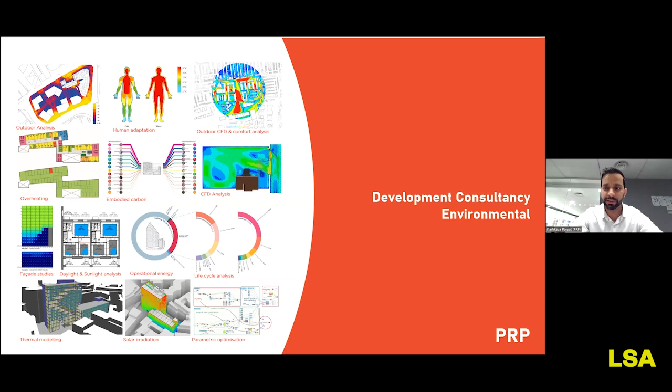So very quickly on my background, I've got, if I can say in a more polite manner, a very strong background in terms of environmental modeling. What you're seeing on the screen is different kinds of environmental studies that I've carried out in the past through my journey of environmental design. This extends from any kind of outdoor analysis to indoor analysis, and it extends in terms of breadth from human adaptation studies to CFD studies, which are probably considered the most extensive ones, including the optimization between all of these studies.

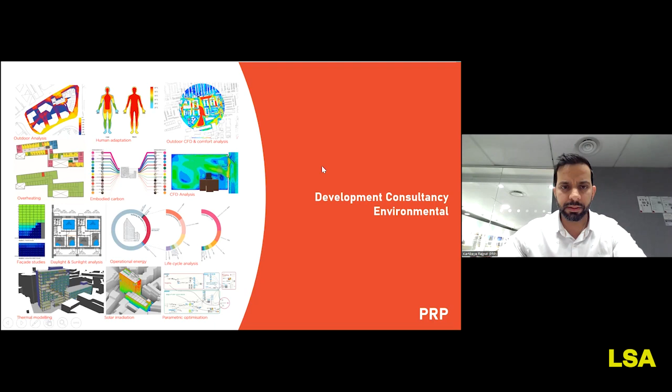So I've got two sides to myself: one is professional, the other is academic. I've been involved - currently working as Associate Director at PRP, but in the past I've been working with consultants, mostly M&E and sustainability design consultants. I've also got an academic side where I've done my master's from the Architectural Association and I'm currently teaching at Westminster, along with having ties with other universities. So I've got two of these sides.

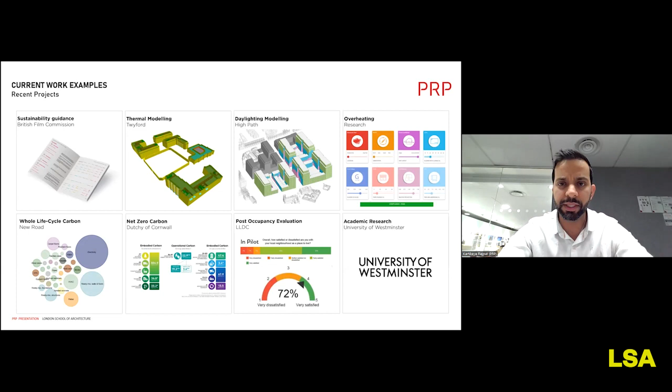More recently, these are some of the examples of the projects that we are carrying out at PRP. So there is a big breadth of work which extends from writing guidances to carrying out post-occupancy evaluation and obviously also undertaking loads of overheating assessments.

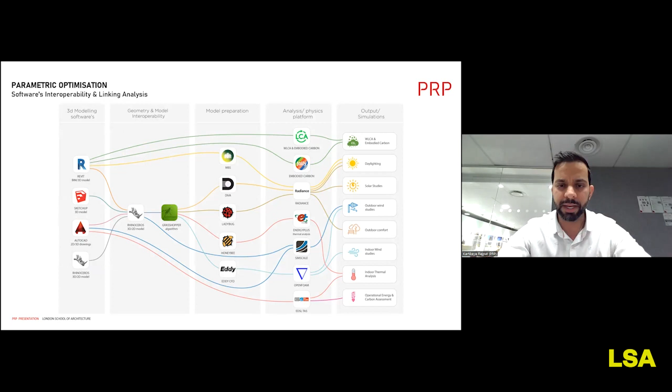One final slide about us. All the environmental studies require a lot more integration in terms of softwares and modeling methods. An important point in between is the building physics platform, which sits somewhere in the middle. So it's not just about doing a modeling, but it's also about understanding what building physics goes behind it, and what are the outcomes of those building physics simulations to lead to some sort of passive design measures on sustainability integration into building. So it's just a prompt on that one.

Moving on to today's session, which is around tackling overheating and essentially focusing on Part O.

I've divided the content into sections to help you understand what we are going through in today's part. We are going to look at the background into Approved Document O. There are two methods in Approved Document O: one is simplified, and one is dynamic. I wanted to introduce both and give you a flavor of the difference between doing simple calculations versus something more comprehensive, which we call thermal modeling. We've also created, or are in the process of creating, our own in-house tool or assessment. I'll show you some quick images of where it is, and there will be key messages dotted around in the slides, but we'll end with something simple for you to take away.

I won't go into today's session in more detail yet. Before we jump to Part O, the real question is: is overheating a concern in the UK? There are lots of parts of the globe where it is, and you may be surprised that a decade ago, people weren't too worried in the UK about overheating. That's probably one reason why we're seeing these new building regulations coming into force.

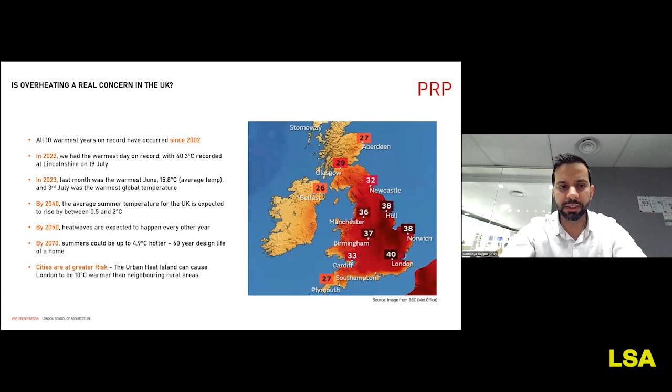Quick points on the future: it's not going to settle down, it's going to get hotter. The same applies to the UK, and it's expected there could be a 5-degree temperature increase by 2070. That's a small thought I wanted to leave in everyone's mind for this session. There's another aspect to this beyond climate change.

This brings a lot of risk to buildings and the people inhabiting them, and essentially these risks are of two kinds. One is a lot more serious, in terms of death, and many deaths are already being linked to overheating, and this is going to increase. That number is expected to be higher, so we have to be more careful about this. On the other hand, there's also the quality of the property, and at the same time this could be considered a defect if a building does not mitigate overheating.

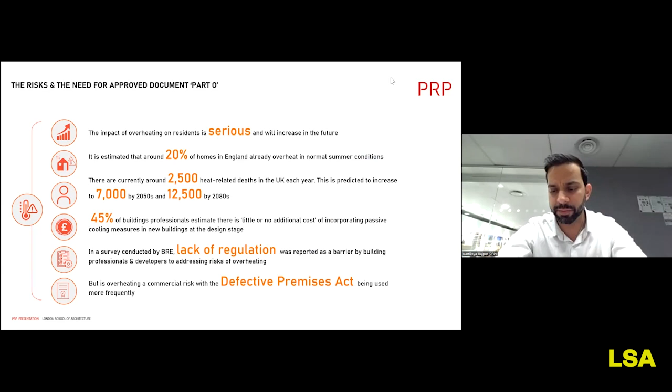There are also studies which suggest that already 20% of UK homes are overheating. So there's been a big requirement for us to come up with a regulation, and that's why you're seeing Approved Document O, which has now become part of building regulations.

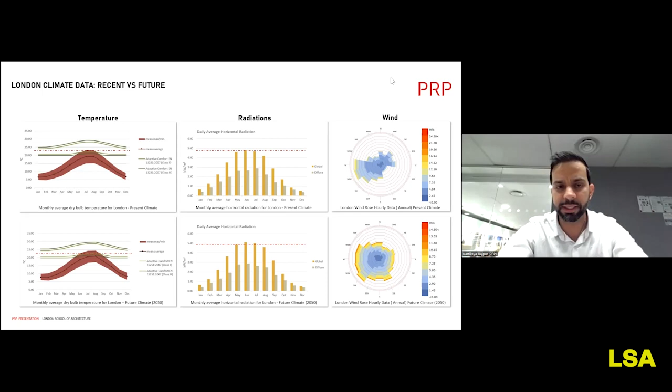Another reminder on temperatures: even when you look at London temperature and compare the present against the future, the next 30 years, there is a very significant increase. Along with that, we have increased solar radiation and a lot more fluctuation in wind speeds. So it's not just about temperature, it's also about solar radiation and winds, and more holistically, the entire climate we have. The UK climate is not the same as it used to be 10 or even 20 years back.

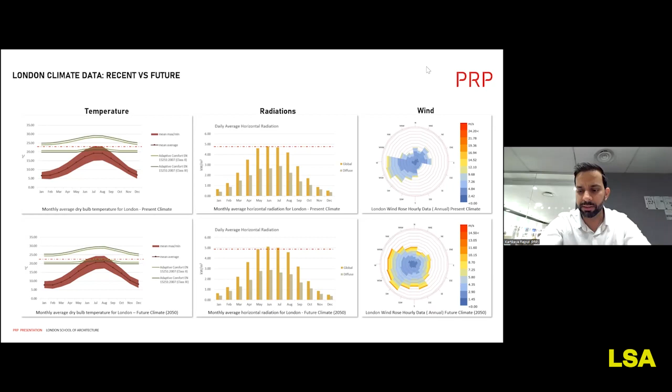It's changing, and it's changing very fast, and that gives us an indication that our building design should also be changing. Hopefully this statement echoes throughout the session as you look at the other slides.

Moving from climate to comfort, which is very important. If you compare climate with how we feel in a geographic location or within a building, it's more important to understand the perception of people and the climate. What you're seeing here are factors like temperature, solar radiation, wind, and humidity, and what subcategories affect our comfort. It's not just one thing that affects comfort, it's a combination of all these things.

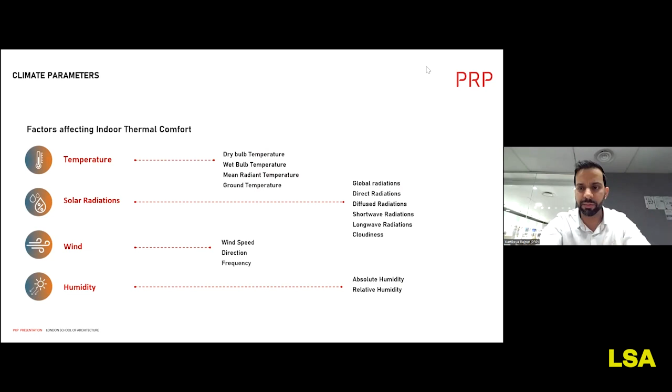More generally, if you talk to people and your friends, they'll talk about temperatures, but that's not the entire story. You have to think of solar radiation, wind speeds, humidity levels, mean radiant temperatures, and lots of other parameters. We're not going to go into super detail, but I do want to bring this discussion to the forefront: it's not just temperatures, there are a lot of other factors involved in achieving thermal comfort.

So Approved Document O is not something new. When you look at what the UK has already been coming up with in terms of guidance, there have been some good guidances, mostly from CIBSE, tracing back to the early 2000s, where principles were outlined for designing for natural ventilation. Later on, criteria were established for doing thermal comfort assessments, which is BS EN 15251. From that we had a technical memorandum from CIBSE around establishing comfort criteria. That got embedded later into CIBSE Guide A. Then we had CIBSE TM59, and more recently now we have Part O.

So we had these guidances, but what we did not have was a building regulation. If you think about it, the principles existed, there were some buildings doing all of these things which was requested, but there was no trigger in terms of building regulations. So that has given us a big strength in this context.

Part O essentially relates itself to new residential development. So it's not relating to non-residential development, but it extends a little bit into building categories related to greater use by people as living spaces. So care homes, for example, which might fall into a non-residential category, have to undertake the Part O assessment. This slide gives you more understanding of that. If the document says new residential buildings, please don't think that it's just residential in the narrow sense - it's dwellings and flats, but it could also be student accommodations, care homes, and other things.

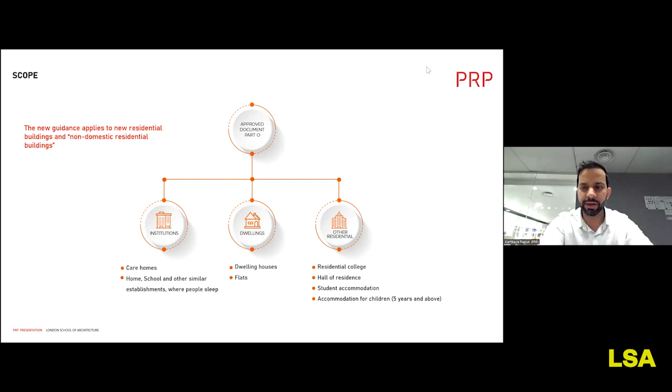So what Part O brings is not entirely new. It is utilizing the methodologies and methods from CIBSE TM59. So usually when I say Part O, I say CIBSE TM59 plus Part O, as a connotation rather than just saying Part O. It's also a prompt and reminder for all of us that it's not exactly new.

Part O is an extensive guidance in terms of what needs to be done, but a lot of it also exists in what we call secondary and tertiary documents. TM59 is one of the primary secondary documents that you need to refer to if you want to understand and go a lot deeper into the principles, the physics, and the criteria being used. Part O wouldn't say much on that - it simply refers you to CIBSE TM59.

So you might ask, what's the new thing? The new thing is a simplified method, which I'm calling approach 1. Approach 2 is reflected back to CIBSE TM59 with some additional controls or additional limits set against it. So the simplified method is completely new, and the dynamic modeling method is piggybacking on TM59. One can think of it as one being a prescriptive approach and the other being a simulation method.

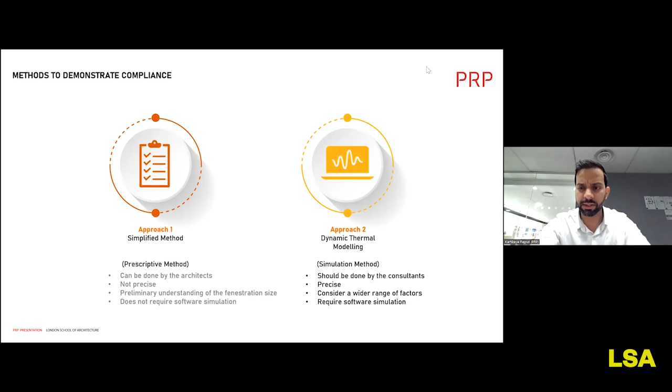So Part O, in a very simple manner, talks about two things. One is mitigating overheating, basically limiting the solar gains inside the building during summer, not winter. At the same time, it requests providing enough means of removing the heat, i.e. natural ventilation measures, so that we can make the best possible use of passive design.

In addition to that, Part O has also come up with some safety requirements where we found situations where, although the building is making use of passive design measures, it's not following the principles of secure by design or safety or other things. So Part O helps in bringing all of these disciplines together.

Even in this document, mechanical cooling is left as a last resort. So on all your projects, please don't go with mechanical cooling from the start. You really have to explore passive measures first, and you have to demonstrate that you have undertaken those processes.

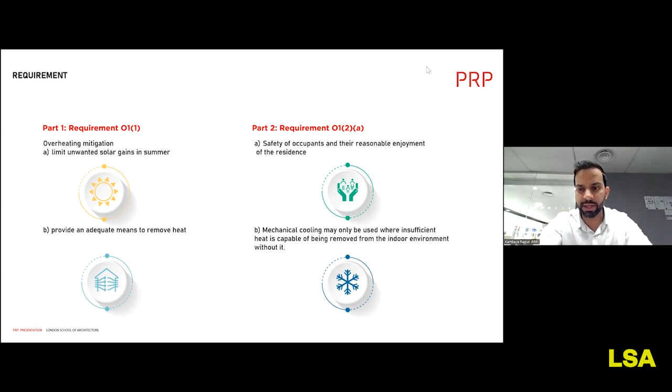So the simplified method is, to make it simple, England has been divided into two categories, high risk and moderate risk. Then the ventilation aspect is divided into units which have cross ventilation and single-sided ventilation. The last one is orientation of the facades - wherever the proposed building has a bigger orientation of its facade.

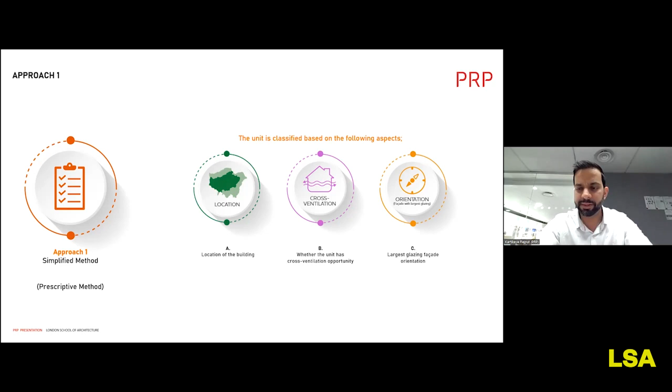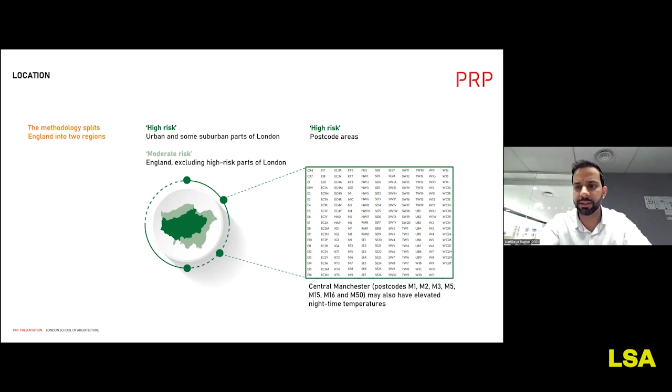So if you have this information, you would be able to make your first step towards a quick prescriptive method calculation. This is not dynamic, it's simply based on hand calcs. There are codes which define what is high risk and what is moderate risk - you can find it in the ADO, Approved Document O. Then you look for your postcode and locate your building, and you might be able to understand whether you are in a high or moderate risk area.

In terms of cross ventilation, the definition is something very interesting, because if you look at different documents, cross ventilation means something different. The idea is fairly easy for everyone to understand, but in the past, or even now, it has not been entirely resolved what you would classify as cross ventilation. This is related to the complexity of the buildings and the unit itself. It's an important point for all of you - if you look at all these building regulations, what does cross ventilation mean? It's a very simple thing, not something complicated. But this is where the complexity lies in the reality we get stuck with.

There is another prompt on cross ventilation - if you look at the new London guidance, you see another definition. Moving on to Part O, it's making it very clear that the opposite walls of the units, if they have windows, that is what we would mean by cross ventilation. This assessment is at unit level, not at building level. So your building might have windows on two ends, north and south facade for example, but that would not qualify as cross ventilation if the unit itself doesn't have the opportunity for cross ventilation from the two ends. So please remember it is unit level assessment, and it has to be on the opposite ends.

Once you have this information, the next step is how do we apply these two criteria: limiting solar gains and removing excess heat. To tackle this, the simplified method has capped the maximum glazing areas - you can't provide more than a certain amount of glazing ratio. They have also outlined the minimum amount of ventilation area that is required. So those are the two things you need to achieve when doing these hand calculations.

So I've tried to simplify the guidance from ADO, since sometimes when you've looked at it already you might find it a little confusing. Hopefully these diagrams make it easier for you to understand. If you follow the method from the top of this diagram - first deciding which location you're in, high risk or moderate risk, then deciding cross ventilation or single-sided ventilation - you get all the percentages required by the criteria. If you follow that sequence, it might make it a lot easier to interpret this table. I don't expect you to interpret it alone, so I've made some simple studies to help you understand.

Essentially, it is location, single-sided or cross ventilation, and then different orientations of glazing facades. With those things, for all these different options, you have to meet different amounts of glazing ratios. Very simplistically, for criterion one, limiting solar gains, we have to comply with maximum glazing area at unit level as well as at living room level. So you have to comply with these glazing ratios against the unit floor area and also against the living room area - that's what G1 and G2 represent in this case.

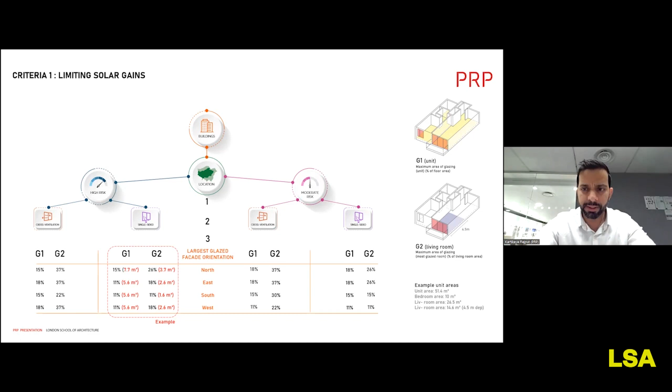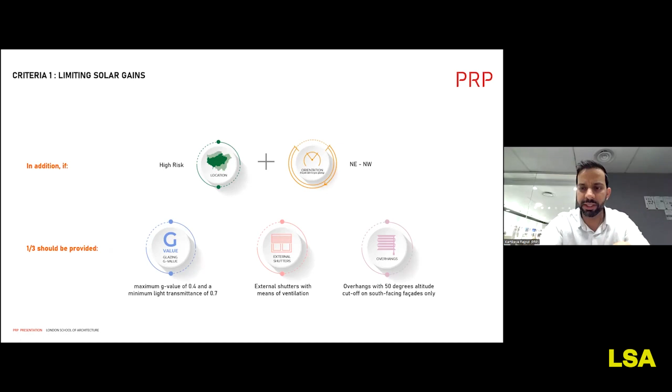So in addition to that, based on the orientation of the unit, which is where the maximum facade area is, we also have to provide one of three options: glazing with solar control, external shutters, or overhangs. These are the requirements for limiting solar gains. And if you think of it in terms of percentages that you have to meet for glazing ratios, it might make a lot more sense why that table was structured that way.

In a similar manner, in terms of making sure we have enough openability at a unit level, there are percentages outlined at unit level, but this time it's also outlined at bedroom level. So compared to the living room, now you have to do a bedroom calculation as well. What we have to do is, again, identify the location, identify which building risk category it falls into, and whether it has cross or single-sided ventilation. Then you provide for those percentages outlined in the ADO.

All these percentages you're seeing in the diagrams, you can find in the ADO. It's just a direct extraction from there. What you would have noticed is that there are some opening percentages against a facade option which are very, very high—you can see there's 95% of facade that has been asked to be open. So we've done some case studies which will make it easy for you to understand the implication of these calculations.

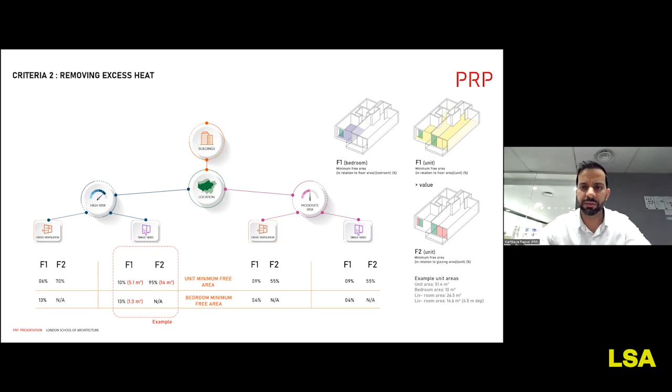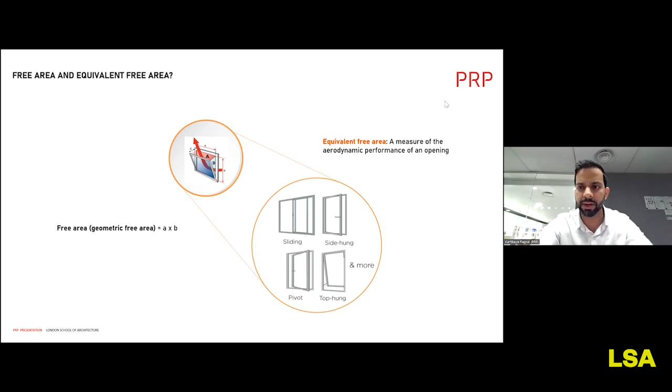But before we jump into that, an important reminder is that these openable areas are not based on just the size of the window. It's something we use very often in environmental considerations, called equivalent free areas, but it might be more challenging for you to do these calculations if you're new or haven't been aware of this. Essentially, these are much more detailed calculations which account for the opening of the windows, type of windows, angle of the windows, and other things. It's something we've done very commonly when we do fire vent and smoke vent calculations.

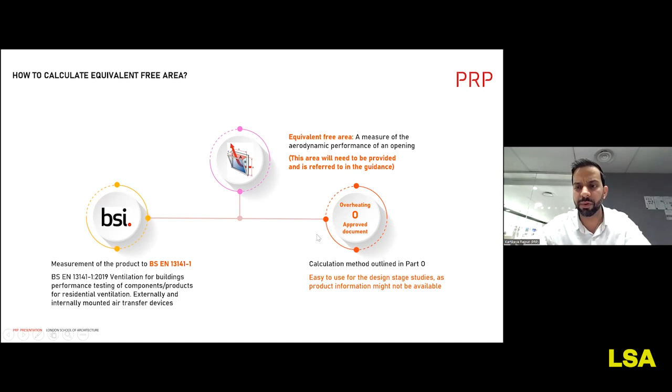Part O has also created a method where you can do these calculations. So you have to do these calculations before you arrive at your openable areas. So it's a reminder again that you have to be careful—it's not just the size of the window, it's a bit more of a complex calculation.

So for this session, what we've done is taken one of our case examples. This is in London, one of our projects. What we've done is taken a one-bedroom studio in a typical ten-storey apartment block building. We thought this assessment could have a lot of impact on the standard units we usually do, and hopefully this would also be a standard unit in terms of sizing that you might be currently working on. It's not very different from current building standards in terms of areas and other things. But keep in mind, this is for a flat assessment, not for houses or detached units.

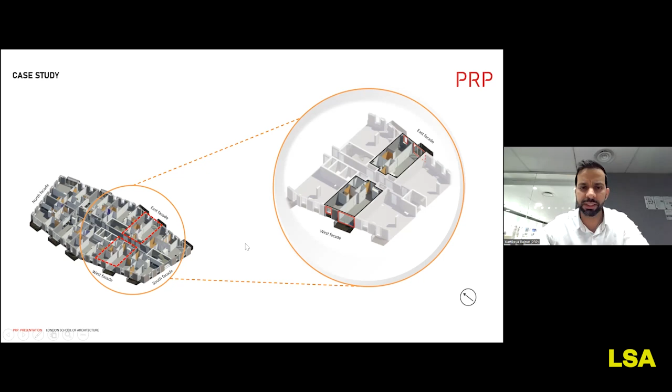So what we did is we took two opposite orientations, east and west, but the unit size is exactly the same—it's an exact mirror of the unit. We did the study for east and west to understand what the implication of this requirement is.

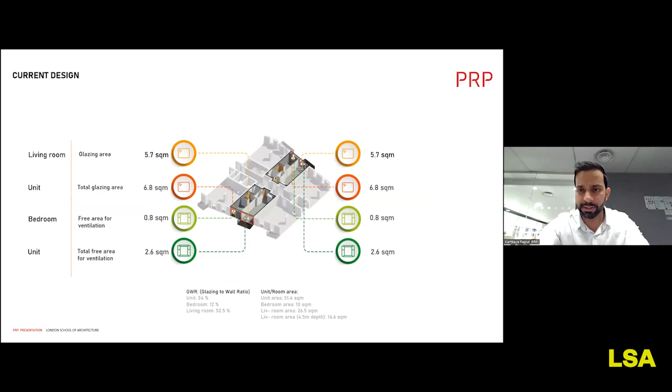Then, the criteria I just showed, we converted them into areas. So we did this whole set of calculations in the background, and arrived at the requirements at unit level, living room level, and bedroom level. We converted these ratios as requested by the simplified method, and then converted these areas into percentages as requested in the ADO method. So we did this calculation in the background.

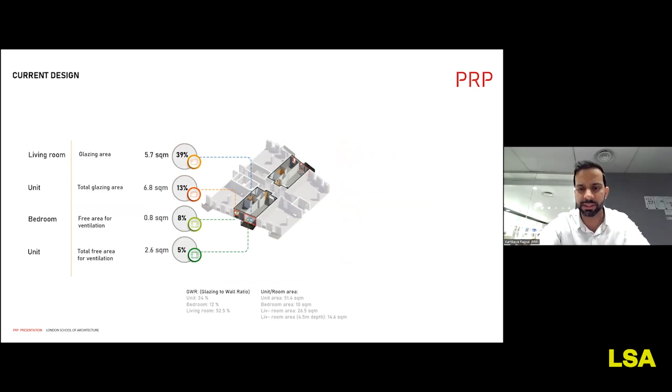The next step for us was to compare what we need to do. So we did the comparison, and it's shown in the circles you see on white background. Probably here I would explain a couple of points, but the two main important things that stood out were when we compared our unit to this requirement, there was something we had to comply with.

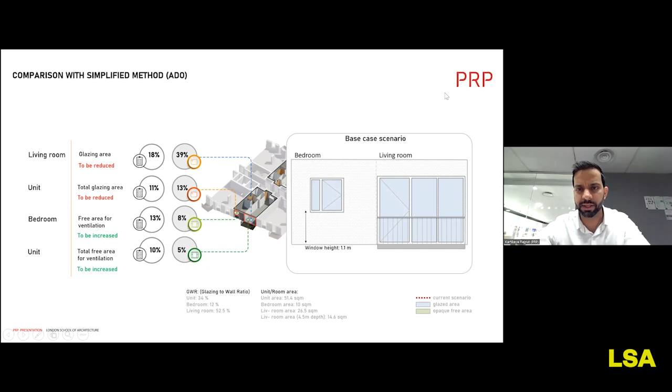Next, we started looking at the impact of these ones. So we looked at, okay, if we have to reduce or match this limit, what will happen? You could see the impact on this living room - it's almost like we have to reduce our glazing to half.

Moving forward, we had to make more adjustments on unit level. We made our bedroom window slightly smaller, and to accommodate more ventilation in the bedroom, we had to change our window sizes to be tighter. The next thing was, at unit level, to meet this free area requirement, we have to add a vent. So you would probably see the amount of changes that this facade is going through to just incorporate these simple guidances or percentages.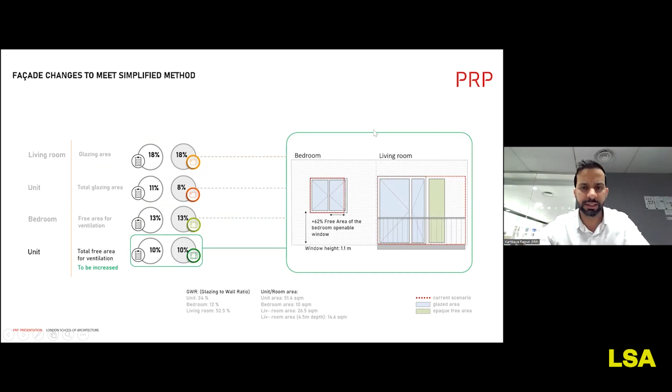Then we did more calculation based on equivalent areas, and this is what the facade would look like to comply with this requirement. Essentially, what's happening is that almost everything has to be converted into a vent, which could have a very detrimental impact into energy aspects and could also have an impact on daylighting.

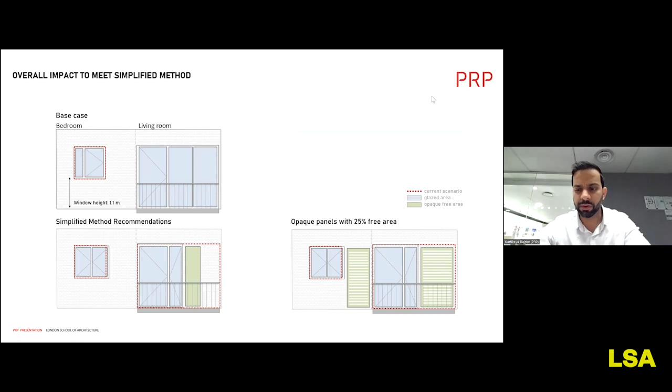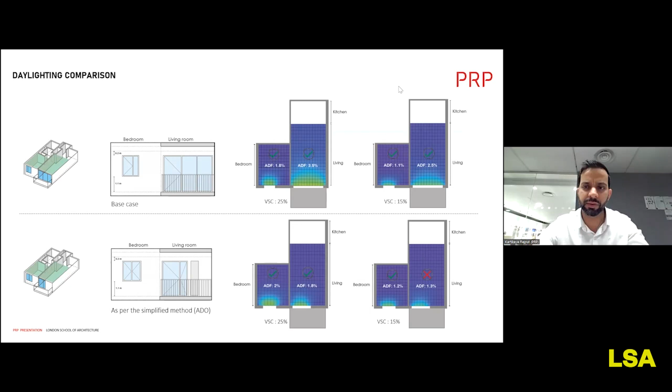So we did that test as well, and you could see that our daylighting was failing for the living room as well, which is another requirement that you have to meet on your projects. So if you start thinking of aligning with energy requirements, daylighting, and overheating, there were some contradictions here. What we did, in summary, is move very quickly away from it, and we said these are very quick, 4 simple outcomes to put forward.

We believe that the simple method is not simple, and it requires a lot of calculations. You have to do all those calculations for every kind of unit, which is showing some difference. So there's a whole host of calculations that needs to be done in the background, and you might make lots of mistakes when you're doing these ones as well.

Second is that the simplified method had lots of limitations on facade design. So all facades will start looking very, very similar, which essentially is not what we want to do from an aesthetic point of view.

There was a lot of challenges for developers in terms of having different requirements for different orientations, so their standard house types would take a little bit of a hit on that. And the guidance itself says that if you have communal heating, you can't use the method.

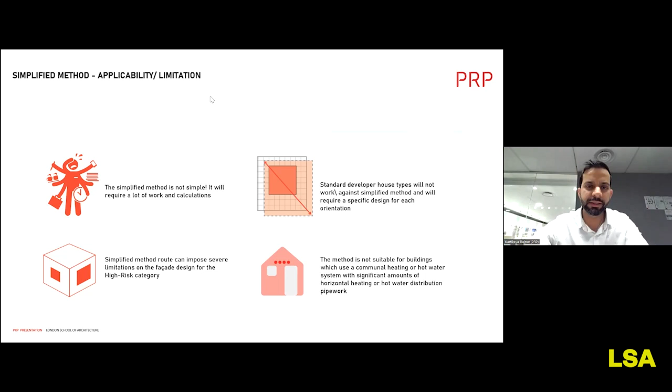So instead of simplifying it to this level, what we thought is the approach for us should be to go to full dynamic modeling for all kinds of units that we have, and we are going to build in something which is more robust, not just in terms of environmental qualities, but also in terms of its viability, its aesthetic character and other things.

So moving on to the second part, hopefully this gives you a good introductory idea of the simplified method. Then we move to the dynamic thermal modeling method - this is where I want to bring more of your focus.

Dynamic thermal modeling is something which you can test in a dynamic way, where the dynamic word means more related to the dynamic of the climate that we are subjected to. So in simple terms, every hour of temperature, or the simulation that you do, every hour gets accounted, and the effect of every hour's changes gets accounted into the results.

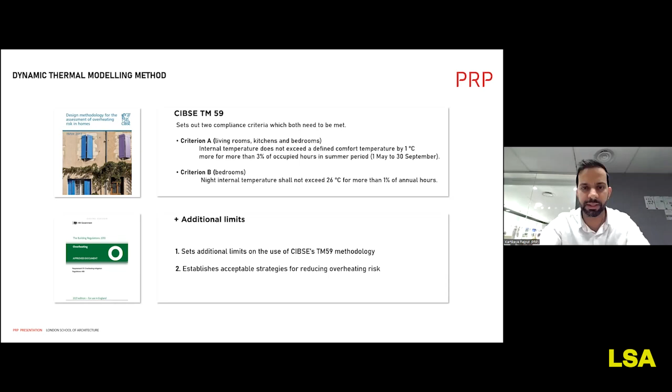I mentioned already that we are using CIBSE TM59, but there are some additional limits that Part O brings on top of TM59, and we'll go through what these are. But if you think that we have made this switch from simplified method to dynamic method, that will be a good start.

So essentially, these are the limits that Part O has placed on TM59 - additional things that you have to do. They might sound very complex, but I'll go through them in a simple manner.

What has been done is that you cannot open the windows when the temperature does not exceed a certain level. This is because it has been misused in previous assessments. People carried out assessments with assumptions that windows will be open at 10 or 15 degrees Celsius, which usually isn't the case because it's more dependent on occupants. When occupants feel warmer, they start opening the window, so they've limited it to open at certain temperatures.

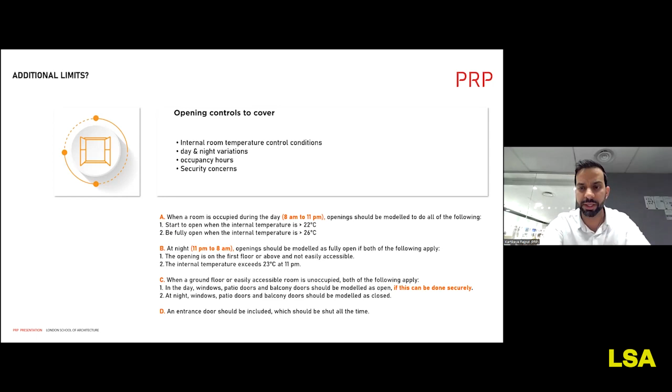There is also more guidance around what is nighttime and daytime, so those time periods are being classified now. There are also issues covered around secure by design and safety aspects, which is a very welcome initiative, because we need to align these requirements in our design. We can't just say environmental consultant, open the windows, and yet it's not secured, so occupants would not use it in reality.

For example, it considers more accurate air tightness, thermal mass, opening of internal doors for the benefit of moving air between one room to another, acoustic ventilation, for example MVHRs could also be used as a benefit, shutters which are more extensively designed, glazing ratios, fabric performance. So it covers a whole host of items for informing the results.

If I can bring it into the context of building physics, it also covers factors which are a lot more influential in terms of thermal comfort, both from the outdoor and the indoor factors. So it considers all these building physics factors when the simulation is being undertaken.

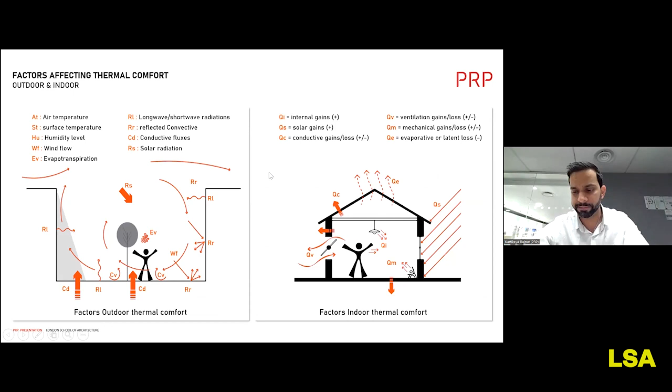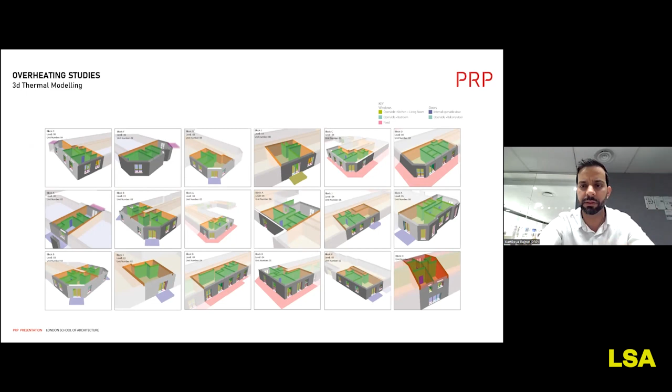So what thermal modeling looks like is something like that. If you think of it, it's not a Revit model, but it's an independent thermal model where you've got all the information about different sizes of windows, how they open, orientation, relationship between one space to another, thermal transmittance, all aspects of heat transfer, for example conduction, convection, radiation. You're looking at all of these parameters together and churning simulations. This is the part which becomes very extensive, and you need to be more aware of building physics to control these kinds of factors.

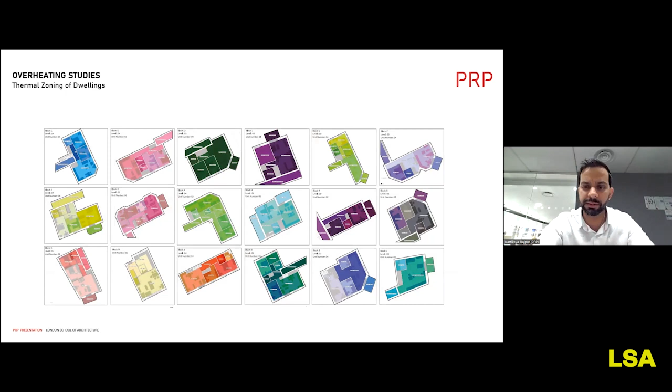This is an example of how we do zoning. It's very important how you connect one space to another, because there's always heat transfer that happens from one space to another. So it's not just outside against inside where the facade becomes the most important, it's also about how the space organization has happened within the unit itself, and how energy moves from one space to another.

So a little bit more of a sneak peek into what it looks like. We use architectural drawings to create the 3D model, capture right volumes, orientations, weather data. Then we create our own constructions, which are more accurate in terms of materials and other things. We identify all the openings, the percentages they open, and what you essentially get as an outcome of the results is this sort of table where you can look at every room and assess whether this room has complied with the criteria or not.

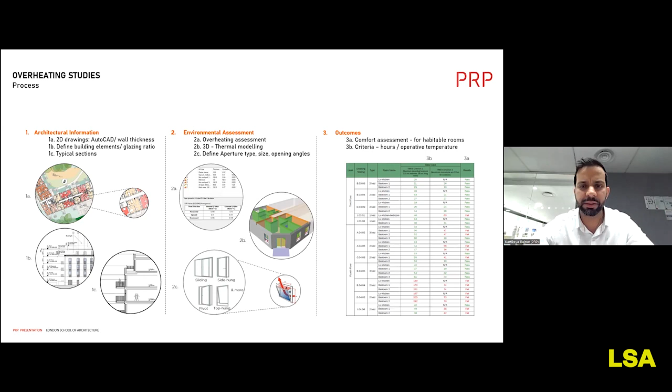There are essentially two criteria you need to comply with for bedrooms, but living rooms you just have to comply with one criterion, which we call in TM59 criterion one. But bedrooms you have two criteria to comply with to demonstrate a pass. Using this, you can assess whether the space or room is failing or passing, and then you can do a lot of iterations, go back and forth, and start improving those kinds of things.

So with the same example, you saw the extent of the implication that the simplified method had on this unit. So we took the same unit and did the dynamic thermal modeling. But here what we said is that we know the design already has some good features incorporated, and we are going to check the benefits of that. Those features were like using MVHR, for example, during the summertime to provide additional ventilation.

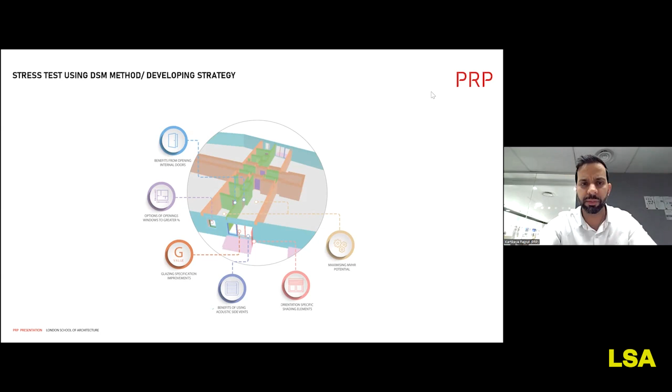We had shading which was more specific to orientation. We also looked at the glazing specs, which we can optimize further, the opening areas and the type of windows, and also the benefits of how we can open and close internal doors to have some sort of comfort.

So we created these 5 examples where case 1 was TM59, case 2 is overheating ADO, which is essentially a cumulative version, TM59 plus ADO.

And then we created some further cases which are very relevant to London context, dependent on acoustic and non-acoustic environment. Because you might have seen already on your projects that if they are near rail stations or busy roads, you are not allowed to open those windows. So we thought we need to build this sort of intelligence into our simulations, which is what you're seeing as the variation between acoustic and non-acoustic.

And we tested those results. We did lots of iterations, but essentially this is the summary where we could make our spaces work. If you look at example case 3 and case 5, which is a non-acoustic and acoustic environment scenario, we were able to make this unit work and comply with the requirement. Why we've been able to achieve it is an outcome of looking at multiple factors, not just a few. Even though the ones in simplified methods are primary factors, no question, there are also factors which have their own bits to contribute towards achieving comfort, and this is what this study demonstrates.

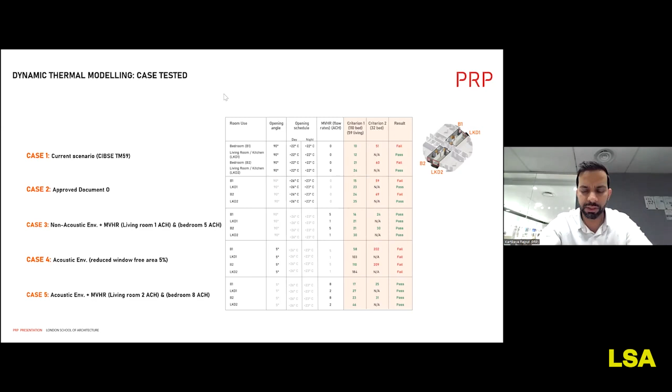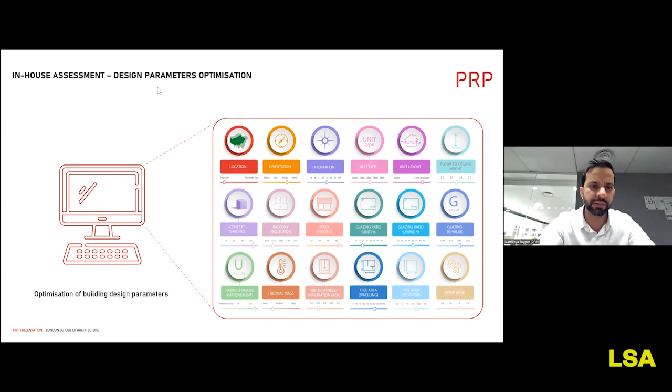So what we did is create our own list of factors. This is not all of them, but we started creating this sort of optimization, what we call levers and optimization parameters. We started playing with it, saying in what areas we have to have deeper balconies, or where we do not need to because there is shading from the context, where we do fixed shading, where we do glazing ratios, where we do glazing spec, and lots of other stuff.

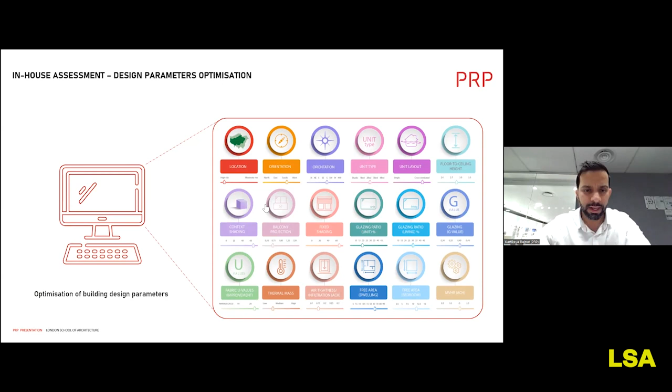And if I can do something very quickly, hope this video works for you. We started converting it into using our dynamic simulation model, converting it into what we call a calculator, where you could quickly play with these sort of studies, change them, and look at whether we can comply or not. So this is what we considered as our simplified version of the assessment, but it has a lot more intelligence around dynamics, fed by dynamic thermal modeling and real case examples.

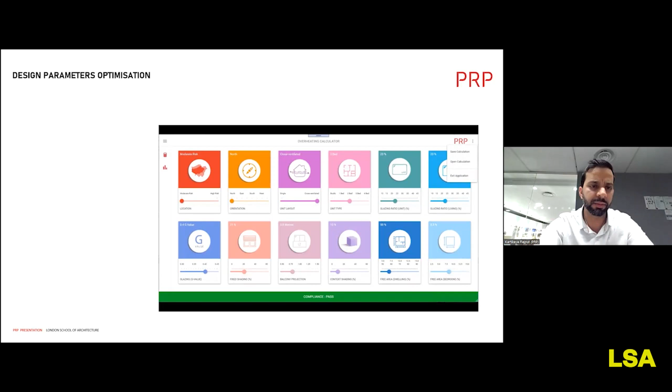So I'm moving a bit to what are the main strategies to consider, more on the side of what we should be doing. I tried to make it super simple rather than complex, but hopefully these titles and words will resonate with all of you and your projects. So I tried to make it very simple.

But the most important thing is for us to understand the orientation of the building. That's key for us to unlock these passive design measures. Sometimes it's the site itself which gives you challenges, but it's critical for us to understand the orientation. I can't stress this more, how important it is.

If you think of environmental considerations, it's almost like a sequence. If you make a bad first move, you have to do a lot more good moves to offset that bad move. But if you make a good first move, everything falls into place. The next will be easier, and another will be easier, and another, sort of thing. So orientation is the most important.

You could also get a lot of benefits if you are doing a development which has blocks, playing with the heights and how you place these blocks in the context of each other to add those benefits. These are not struggles, these are just intelligence you can build into your projects where the building is more than one block.

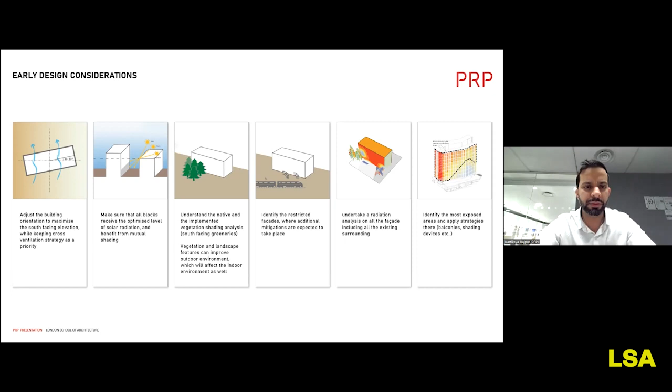Undertake facade radiation studies. This isn't a very complex example, but you should be able to run some quick calculations to see what's happening on different facades. Based on that, you can design them differently. They don't need to look very different, they just need to respond to different orientation. That's the main key point.

An example of that: if you look at these two simple boxes, one facing more south and the other with a different orientation, shown in gray. If you add some simple features like horizontal and vertical shading, what you see in red is how much sun you can shade during different seasons and times of year.

These are simple benefits you can get. For example, with horizontal shading, you can see that during peak summertime, you've been able to shade for some of the hours. These are very simple sun path studies you can undertake to estimate where you want to shade and where not.

Hopefully the diagram shows the difference they can have. For example, although the building is exactly the same, if you incorporate a vertical shade for aesthetic reasons, it might not help at all with providing shading to the window during early midday throughout the year. In the other case, you might get shading in summer, but in winter you might still get good sun inside the space.

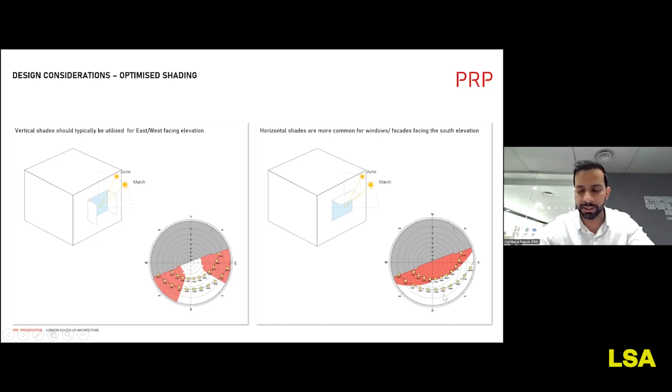These are super simple, and you can extend them however you like. Once you've identified whether it's horizontal or vertical, you can make it more fun, better, and start matching your aesthetics with it.

Currently I'm seeing less of this in our housing developments, but in future there's no reason to think that our facades are not going to be adaptable, because they have to work for summers and might also have to work harder for winters. So adaptability is key when we do facade design. I'd also extend it to adaptability of uses of space, because you can move it around. That's what we've learned from vernacular architectures all across the globe, all types of civilizations - we've always been very adaptive rather than thinking of one space giving the solutions for all.

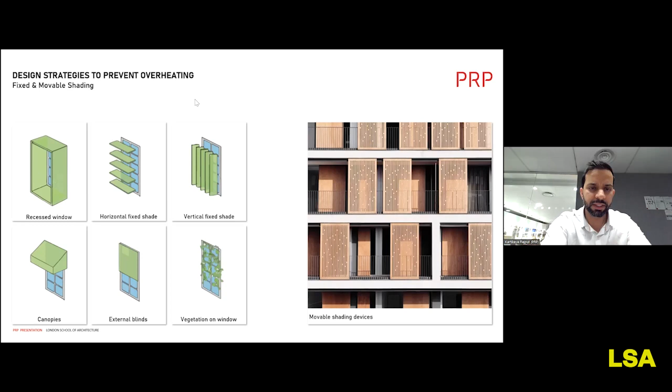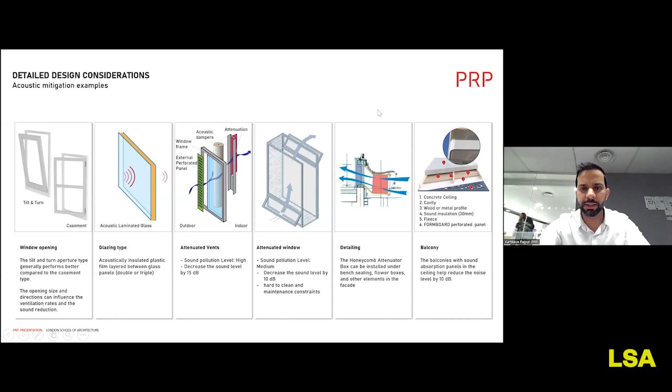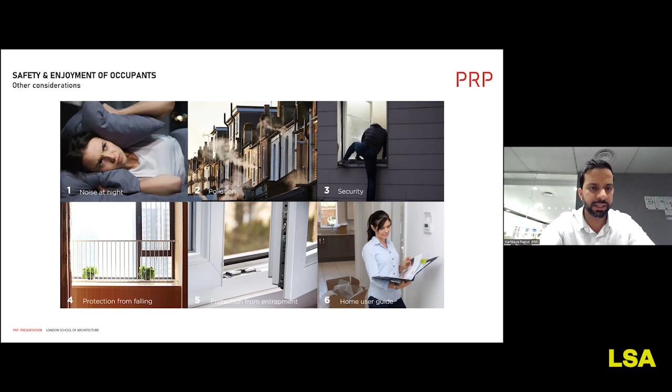The last thing is home user guides. We need to provide home user guides going forward, where people buying and living in these new units and houses understand when they need to open their windows and close them. It might sound cheesy, because we all know how to open and close windows. But we haven't had this experience once you have an MVHR, which is also helping you at the same time. Can you actually open the windows early on and get the benefit of some purge? So there's a good education part we need to integrate even with passive design measures for our users.

Given that we have all this science behind us to help, I think we are in an age where we have to use these tools to incorporate all that intelligence we want, especially when we're challenged not just by one factor but many. In this scenario, we are challenged by overheating, air quality, and noise at the same time, which never existed before, or was easy to handle in the past. So our friend is science and technology.

Then the buildings need to have a combination of strategies. It can't be just one. You can't just say I've done shading and that works. You have to incorporate good ventilation measures, good layouts, and understanding of how you lock your space together.

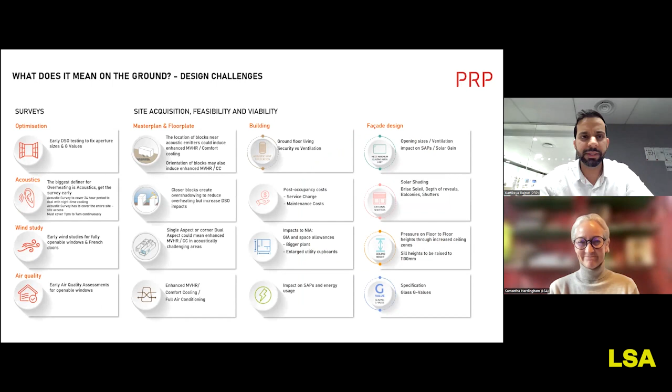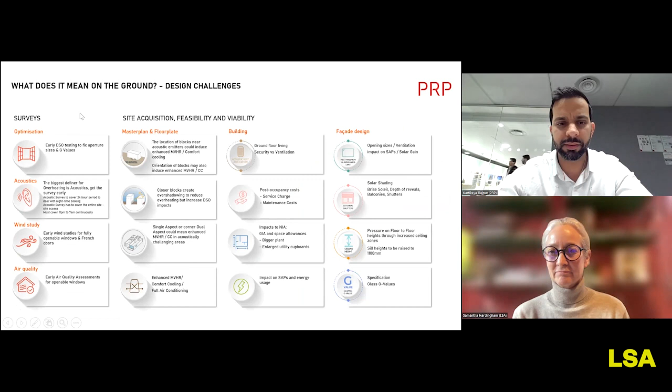This is probably my last slide, or second last slide, to wrap up things. This slide shows what it means on ground. There are lots of things here, but simply put: please undertake your surveys before you start doing the design. It's very important. If you're building next to a very busy and acoustically challenging site, and you haven't done this, you've already started on a step which is on a back foot.

So please undertake all of these surveys, and please make sure they are done comprehensively. If they are not done comprehensively, you might end up in a trap where, because of some simplistic or onerous requirements, you might not be able to develop new steps.

Master planning is very, very important. I mentioned it already, but you also have to link it with how you design your spaces and MVHR systems, and also in relation to design of your facades. There are some things for building levels.

We have to be considerate of cost itself. If you're not going the passive design measure way, and instead including mechanical cooling, that could be a lot more expensive, and there are again some conflicts. Once you go the mechanical cooling route, there could be more challenges in meeting energy requirements. The facade design has to be done more holistically and looked into in a lot more detail going forward. So I would end here.

Thank you very much, Kartikeya. That was just an incredible amount of information to absorb and process, but an incredibly helpful guide to everybody for how to think about the tools we have to help us, and how to apply that data in ever more effective and beautiful ways in designing our buildings and thinking architecturally. So thank you so much.